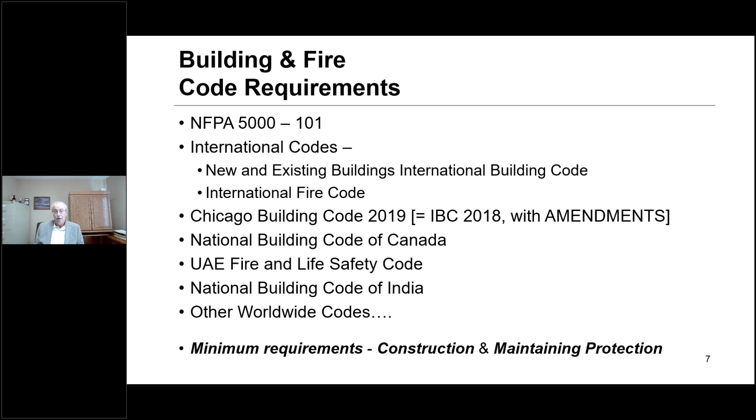One thing I missed earlier - we talked about the National Building Code of Canada. They have a similar code, the National Fire Code of Canada, which covers the same sort of information that the International Fire Code covers here in the US. It talks about how you use the building, what's permitted in that building, maintenance requirements, and things like that. So that's very much an integral part of the Canadian requirements.

So let's talk about fire resistance now. We're going to start basically with fire resistance, then move on to the various breaches or openings in those fire resistive rated assemblies. Fire resistance by definition is a property of the materials or assemblies that prevents or retards the passage of excessive heat, hot gases, and flames under conditions of use.

There are some standards - ASTM E119 or UL263 is what we use here in the US. Canada uses ULC S101. The good news is those three standards are, from a technical perspective, for all practical purposes, the same. Many years ago, approximately 20 years ago, UL recognized that a test run here in the US in accordance with ASTM E119 or UL263 can also be used to show compliance with the Canadian requirements in S101. So that's good news for manufacturers marketing products in both countries.

Here in the US, when we're looking at the International Building Code, Chapter 7 is what I call the nuts and bolts of fire resistance. Once you know what rating is required through some of the earlier chapters - 3, 4, 5, and 6 - now we go to Chapter 7 to determine how we show compliance with those requirements. Section 703.2 says fire resistance shall be determined in accordance with section 703.2.1 or 2.2, without the use of automatic sprinklers or other fire suppression systems being incorporated.

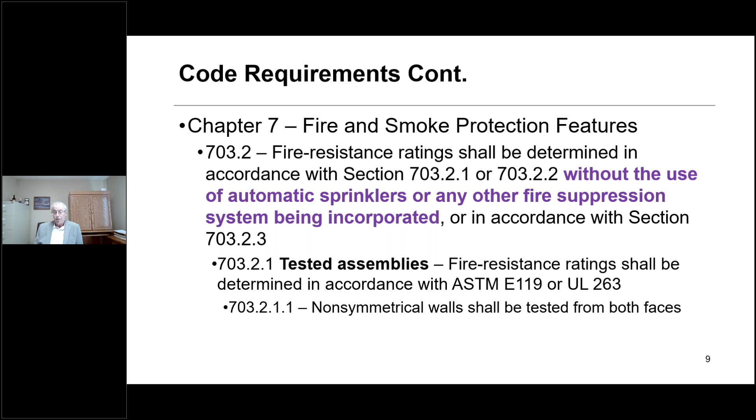Beyond that, I don't have a slide to support it, but the second method of determining fire resistance is through analytical methods - your practical methods. Go to the UL directory, go to the prescriptive or calculated fire resistance in the codes, and that's how you can then show compliance with the code requirements.

But again, those methods are still based on those two test standards. The third method is through the alternate materials and methods section, 104.2.3 by the latest 2024 code, which allows some alternate methods of looking at fire resistance, including the use of a fire suppression system during the conduct of the fire test.

Moving on to chapter 7, one of the basic principles of fire resistance is you always support fire resistance rated construction on construction that has an equal or greater rating. There are a couple exceptions in the code, but for the most part, you're always supporting rated construction using rated construction.

Continuity provisions are another classic example of provisions in the code. Fire barriers shall extend from the top of the foundation or floor ceiling assembly below to the underside of the floor or roof sheathing, slab, or deck above, and should be securely attached thereto. Bottom line: these fire barriers go from floor to the bottom of the deck above to complete the continuity of that barrier, preventing fire from breaching above the top of the fire barrier.

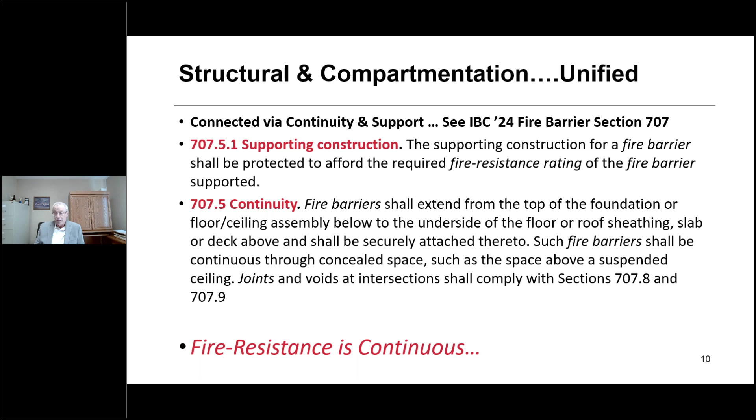Each type of assembly has similar continuity provisions. As far as the standards used to establish fire resistance here in the US and in the United Arab Emirates, we use ASTM E119 or UL 263.

Now, there was a third standard for fire resistance, NFPA 251, that was withdrawn around 2005. The reality is the three standards writing organizations in the US pertaining to fire—UL, ASTM, and NFPA—got together many years ago and said, why are we duplicating efforts, writing three standards to cover the same test procedure? It's a waste of resources. Standards development is a very resource intensive process, so we're spending a lot of extra time for nothing. Ultimately it was agreed that one of those three organizations would withdraw standards where there's duplication, and following through with that philosophy, NFPA withdrew 251 around 2005.

In Canada, we use ULC S101 to develop fire resistance, which for all practical purposes is the same as the two US-based standards. In Europe, India, and the UK, they use other standards. ISO 834 is the international standard. In the UK, they use BS 476 or EN, the European standard 1363.

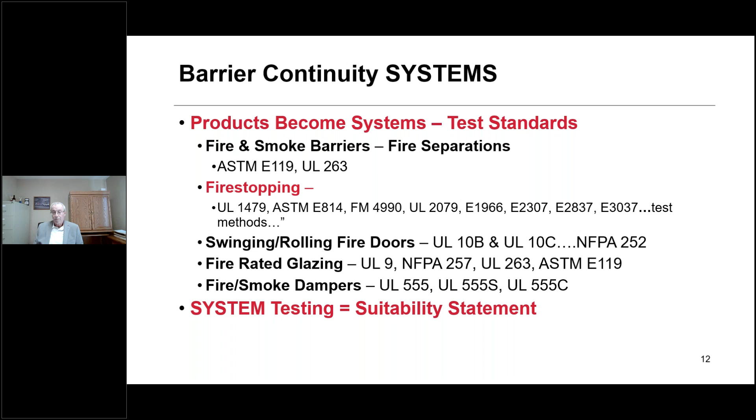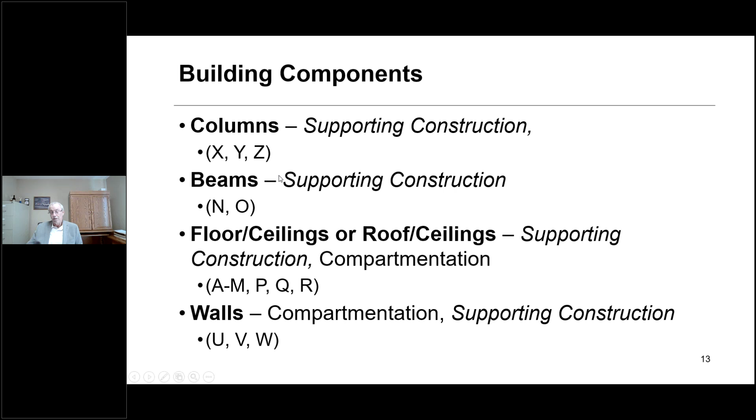In terms of testing for fire resistance, the standard divides the building into individual components: columns, beams, floor-ceiling or roof-ceiling assemblies, and wall assemblies. The letters you see beneath each type are the UL design designations, how UL publishes those listings. Columns are published under the X, Y, and Z series designs, et cetera. That's specific to UL.

Let's look at the testing of these basic building elements, starting with a column - by far the simplest. The sample size is a minimum of 3 meters or 9 foot in length. In all cases here in the US, these assemblies are tested non-loaded or unloaded. Other parts of the world do test columns with a load applied during the fire test, but we don't do that here in America - we test them unloaded and use a temperature criteria.

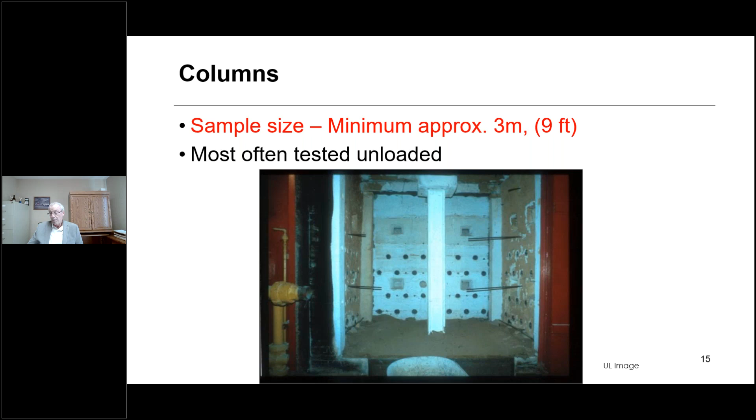In a column test, the testing laboratory typically purchases the column, pours a concrete cap on top and bottom, puts legs on it to keep it upright, and installs thermocouples embedded into the steel to measure the temperature rise during the fire test. The criteria relates to temperature rise. The furnace door is slid closed, the natural gas jets are ignited, and the temperature follows a standard time temperature curve. When the steel temperature reaches 1,000 degrees average or 1,200 degrees at any individual point, that's referred to as the temperature endpoint or fire resistance rating of that column protected in that particular manner.

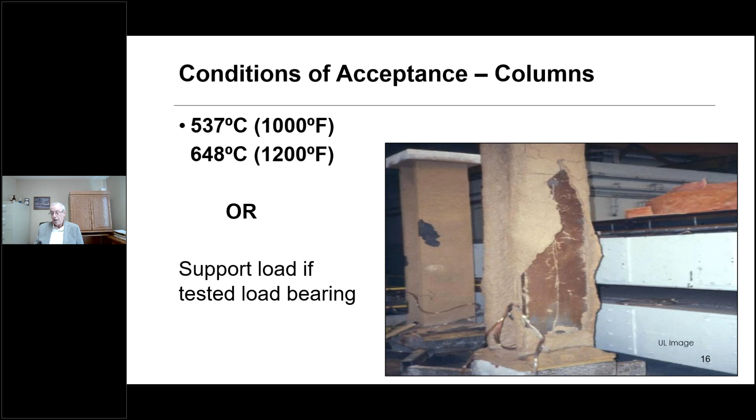We can do fire modeling on straight fire resistant materials quite easily, but what those fire models can't account for is the fall off of material—they can't predict that. That's why I always say, and UL's policy was always, that we use fire modeling to supplement fire testing. Once we've established that material stays in place, then we can use fire modeling to monitor heat transmission through the assembly.

The concept of a full-scale assembly is that it's large enough to allow the assembly to be loaded during the fire test, and large enough to get a significant amount of deflection. So mid-span, we may get somewhere in the neighborhood of 10 to 12 inches of deflection on that beam. As it's deflecting downward, it places the protection materials into tension, causing or promoting delamination of the material. If the material is prone to delaminate, it's going to do so under those conditions. That's why the standard is very specific in terms of the minimum length and the fact they're loaded during the fire test.

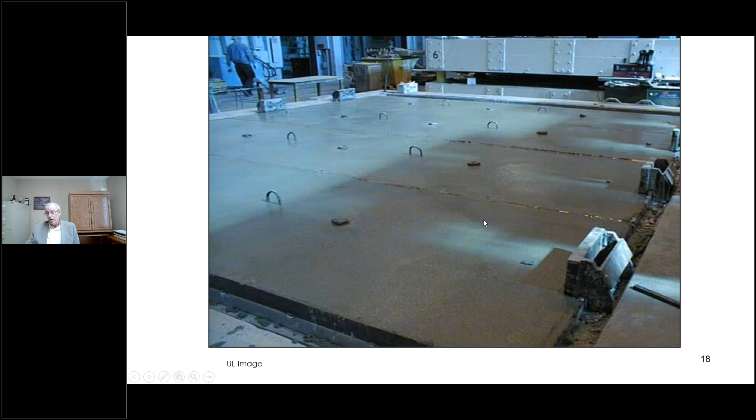After the concrete's cured, the manufacturer's rep comes in and installs the protection material. In this case, it's a sprayed fire-resistant material on the underside of the assembly, applied to the beams themselves. This assembly represents a construction method where the steel deck is not protected. In some cases, a steel deck may be protected.

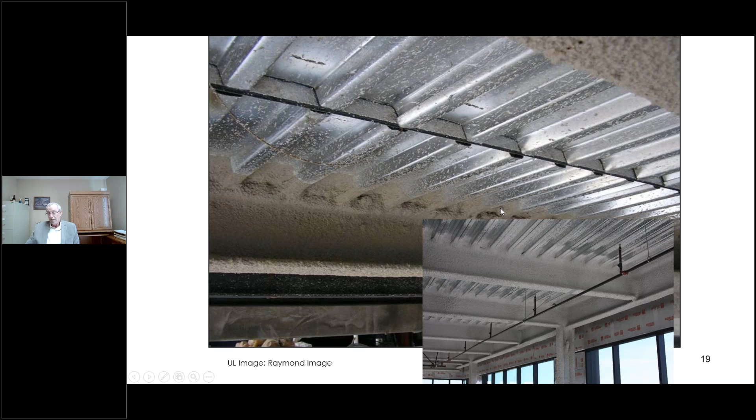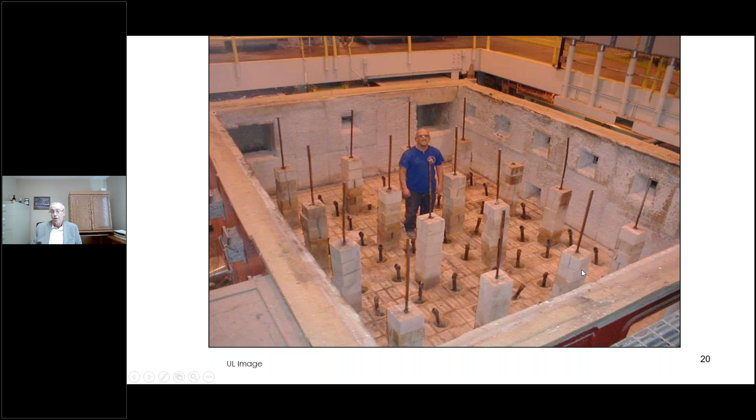This is the furnace that's used for determining the fire resistance of those beams, and for that matter, floor-ceiling assemblies. Andy is standing in the furnace, so you get an idea of the relative size of the assembly, 14 foot by 17 foot—it's a full scale, large scale assembly. The pipes coming off the bottom of the furnace are the natural gas jets. These taller pipes are the thermocouples used to measure the temperature within the furnace during the test, following that standard time temperature curve.

So the furnace fire is ignited. The furnace temperature follows the standard time temperature curve, with loading being applied simultaneously. As the beams heat up, they lose their strength, they begin to deflect, and ultimately the conditions of acceptance would be that the assembly needs to support the load, or there are some temperature limitations.

Temperature limitations would be 1100 degrees Fahrenheit as an average of thermocouples on any beam, or 1300 degrees Fahrenheit at any individual point. One might ask why we have both supporting the load and temperature as criteria—it kind of relates to the restrained versus unrestrained argument. I won't get involved in that right now, but that's why measurements are made both ways.

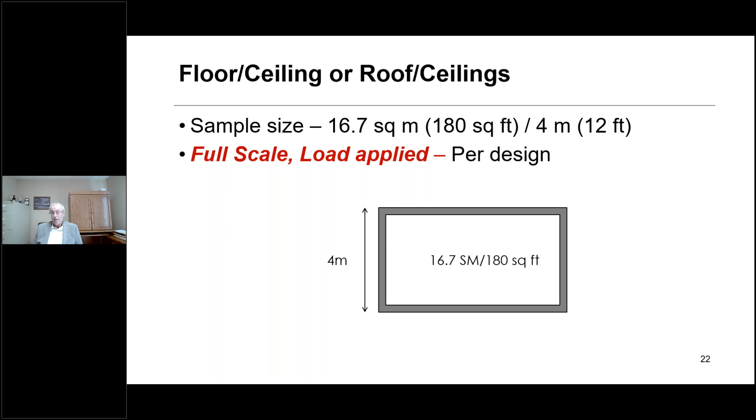As far as a floor ceiling assembly, it's pretty much the same. We have a large scale sample, minimum 180 square foot, no dimension less than 12 foot. Once again, they're tested full scale with a load applied to the assembly during the fire test. The construction process is very much like what we just saw for the beams, so I won't show that to you again.

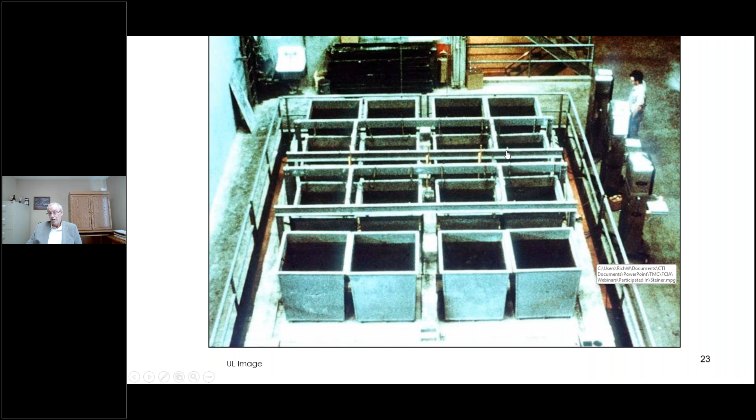And like we saw for the beam test, beams are loaded to their maximum capacity through hydraulic rams, applied through this steel loading equipment placed on top of the furnace.

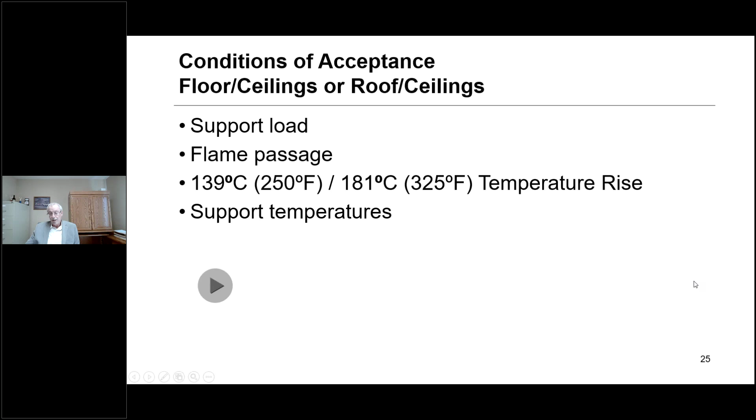So we have 4 criteria for those floor ceiling and roof ceiling assemblies. The assembly needs to support the load, prevent flame passage, meet certain temperature limitations on the top side of the assembly, and also the beam temperatures we saw earlier would also apply: 1,100 degrees Fahrenheit average, 1,300 degrees Fahrenheit individual point.

So at this point, I'm going to let Bill cover these next 2 slides. I'll maintain control of the PowerPoint, but go ahead, Bill. Sounds like a good plan there, Rich.

Let's talk about a couple of things. I mentioned early on that we were going to talk about the DIIM for several of those things. Rich just went through a lot of structural fire resistance, fire testing, and that ties in with fire stopping, which is installed in a fire resistance rated wall assembly. The wall assembly, according to the International Building Code and other codes around the world, says that a fire resistance rated assembly needs to rest on a fire resistance rated assembly of equal value. How do we do that? That's the structural fire test that Rich just went through, the ASTM E119, UL263.

In order to protect steel from reaching its temperature at which it softens, around 1,000 to 1,300 degrees Fahrenheit, fireproofing is applied to it, whether it's intumescent fire-resistant materials, spray fire-resistant materials, or boards and wraps. Those materials need to be applied in a way that reflects the listing, including the thickness of fireproofing, and also the manufacturer's installation instructions. The manufacturer's instructions specify the temperature the steel has to be to receive the material, application temperature limitations, and much more. The manufacturer knows their chemistry and how it should be applied, and that's where the manufacturer's instructions come in.

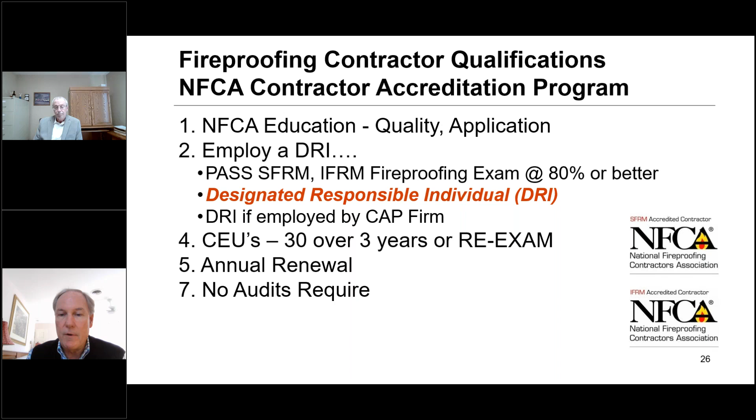The second one is the UL Qualified Fireproofing Contractor Program. The NFCA worked with UL at the same time the FCIA was working on their Qualified Fire Stop Contractor Program. They were paralleling each other, in the time frame 2003 to 2007. At the time, Hugh Dudley was the executive director of the NFCA, and I was working on the UL Qualified Contractor Program with FCIA member volunteers from the accreditation committee.

The Qualified Spray Fire Resistant Material Contractor Program is similar to the FCIA program in that it's got a DRI part too. The difference is that UL looks at the NFCA's exam as the exam to pass. That's different from the Fire Stop Contractors Program, where the FCIA provides the education and the education manual, the FCIA Fire Stop Manual of Practice, and they pass a UL exam for that particular program.

In this one, again, it's the NFCA's exam that gets you there, and then the contractor has to build a management system with 10 points met. How do you manage the things you do as a fireproofing contractor to get it installed in accordance with the listing and the manufacturer's instructions? In a nutshell, that's what these contractors do.

There's a groundswell, I'll say, of companies about to get accredited. There's only a couple currently for fireproofing. There's a couple hundred, over 100 UL qualified contractors in the UL Qualified Firestop Contractor Program. But there's an audit, an initial audit, and then an annual audit by UL personnel, a third-party qualification program. Pretty cool program, and it's something the fireproofing industry has done to have the eye of installation there.

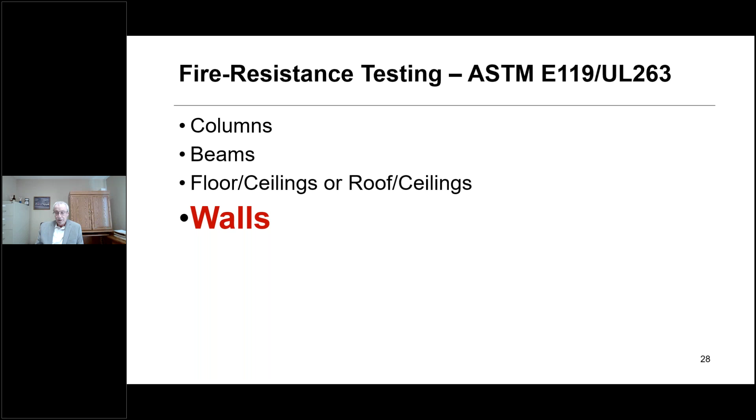So anyway, let's continue our discussion on testing. Now we're going to look at wall assemblies. Before we do that, let's look at the codes. Codes define a number of different types of wall assemblies, each having a specific use under that code. The definitions of these types of walls vary between the various codes, depending on whether it's an NFPA code, an ICC code, Canadian code, Indian code, United Arab Emirates code, etc. So here's a kind of a grouping of terminology.

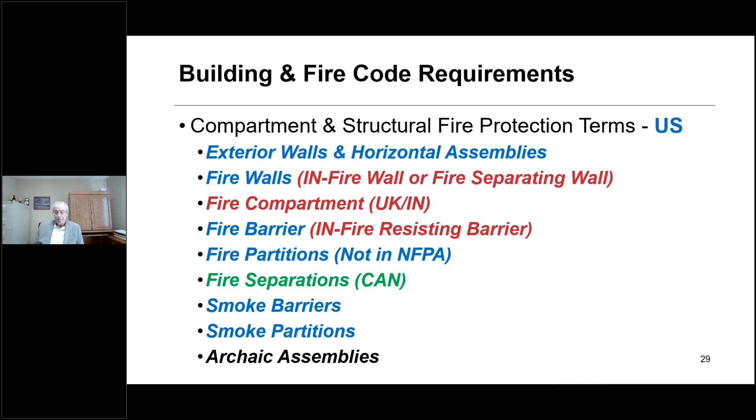So we do that through protecting the structural steel, and through building wall assemblies from materials that withstand that fire exposure.

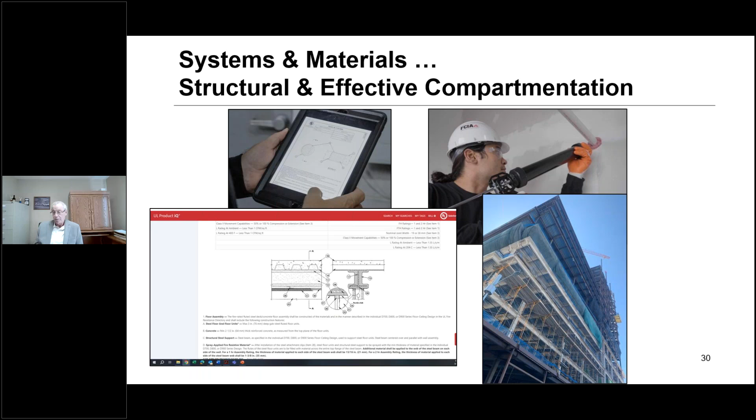So once again, we're talking wall assemblies. We use the same standard time temperature curve for walls as we do for the horizontal assemblies or structural elements.

For wall assemblies, they're tested to ASTM E119 or UL 263 or ULC S101. The criteria really relates to flame passage. There can be no passage of flame through the assembly sufficient to ignite cotton waste applied to the unexposed side of the assembly. They need to limit the heat transmission to the unexposed side to an average temperature rise of 250 degrees Fahrenheit above ambient, or an individual temperature rise of 325 above ambient.

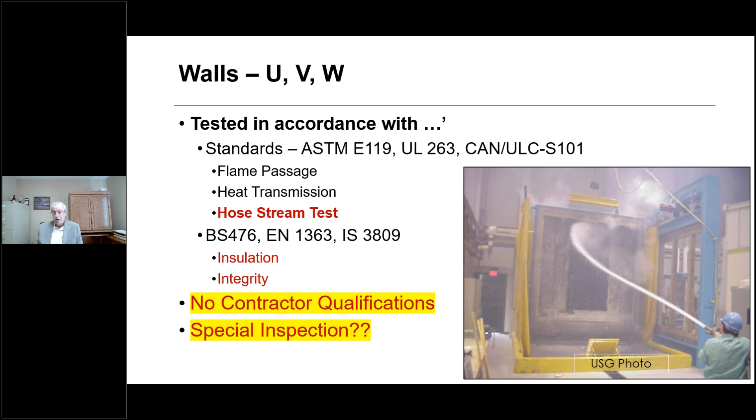So in terms of gypsum board, I don't want to spend a lot of time here, but in general terms we have three grades of gypsum board: a regular grade material, used in non-fire resistance rated construction, typically residential construction for example; then type X, which is kind of the baseline fire resistive rated gypsum board; then type C, which is a little more robust panel.

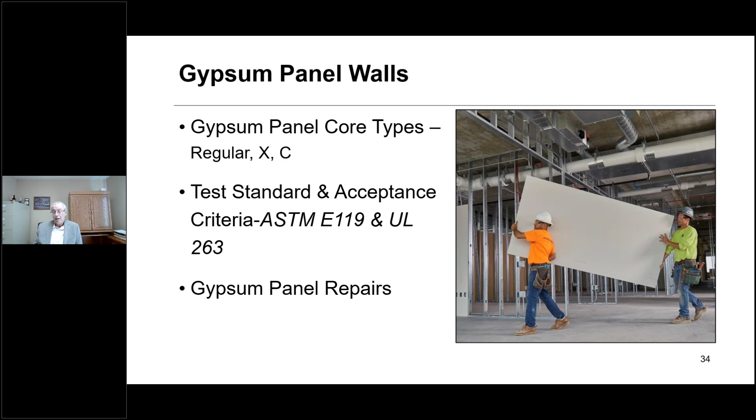I call them a type X board on steroids. It performs a little bit better, uses some additives in the core which control shrinkage and give it more structural integrity. Once again, the same test standards are used for the gypsum board based products as for the rest of the products. There are methods of repairing gypsum panels—we'll talk about those in a minute.

But I talked about the various codes earlier. NFPA 1 is the fire code published by NFPA, and it has some maintenance provisions relating to gypsum panels. It says, where required, fire rated gypsum wallboard or ceilings that are damaged to the extent that through openings exist shall be replaced or returned to the required level of fire resistance using listed repair systems or using materials and methods equivalent to the original construction.

And so there, we'll talk about GA 225 in a minute, which is a repair procedure from the Gypsum Association, the trade association for gypsum manufacturers. But it's not as simple as just covering the hole with another piece of gypsum board and screwing or adhering it in place with sealants—it's a little more involved than that.

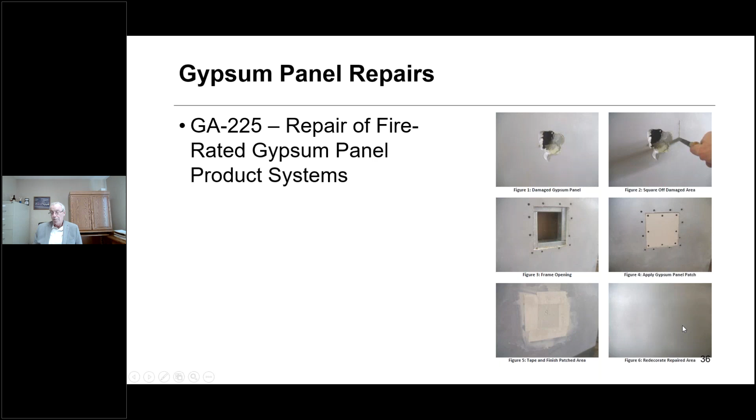You see the screws that attach that framing material around the opening, and then we put another piece of gypsum board cut as close as possible to the size of the opening, screw it to the framing located behind it, then mud and tape it, finish it, and that creates a repair process that restores the rating of that gypsum panel or wall to the original requirements. So moving on, let's look at fire dampers.

Fire dampers are evaluated by a wide range of standards. Fire dampers really come in 5 types: fire dampers, smoke dampers, or combination dampers, which meet the requirements of both a fire damper and a smoke damper. Then a ceiling radiation damper, where we're penetrating the lower membrane of a ceiling. And a unique subset of that is what's referred to as a corridor damper.

I won't get too involved in that, but we have 3 standards here in the US. Likewise in Canada, there's standards to cover that: ULC S112 for fire dampers, 112.1 for smoke dampers. ISO has a standard for fire dampers. There's an EN standard, European norm standard for fire dampers, both for fire passage, what they refer to as integrity, or for smoke leakage.

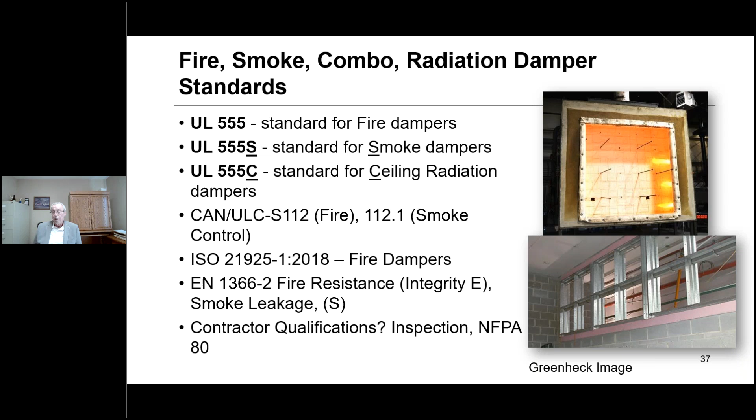There are some pretty specific requirements for installation of fire dampers published through NFPA 80. NFPA 80 is an installation standard that covers both opening protectives - fire doors in other words - and also dampers. So there are some qualifications and requirements for the contractors doing that installation, likewise for inspection of those items once they're installed.

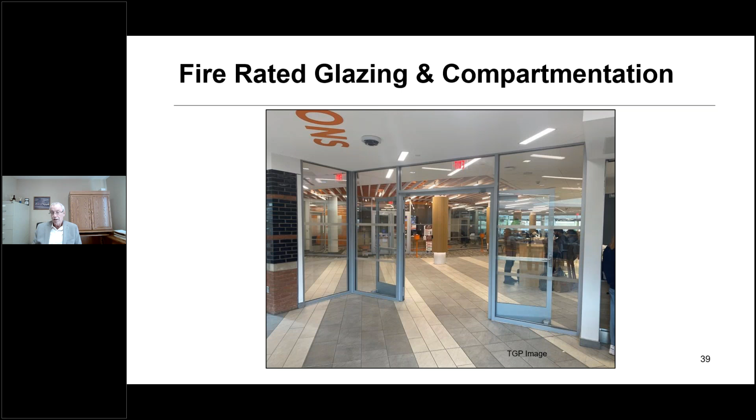So then we have fire-rated glazing, again used to protect breaches or openings in fire-rated assemblies. In this case, we've got some doors and windows on either side of that door that need to be protected. We typically protect items like that using fire protection rated glazing - glazing that gets hot but prevents passage of fire and also meets the hose stream test standards.

There's some standards for glazing when used in doors - they're evaluated as part of the door assembly to UL 10B or 10C or NFPA 252. If they're used as fire window assemblies, they're evaluated to UL 9 or NFPA 257. Likewise, the National Building Code of Canada references testing of glazing to NFPA 80, which describes those same tests. ULC does have a standard for fire protection rated glazing, ULC S106. Likewise, there's an ISO standard that covers flame passage through that glazing material, and an EN standard that covers the fire performance, fire protection rating of that glazing material.

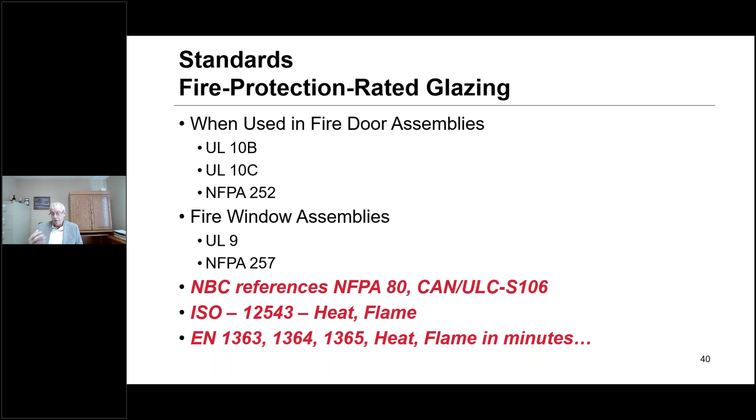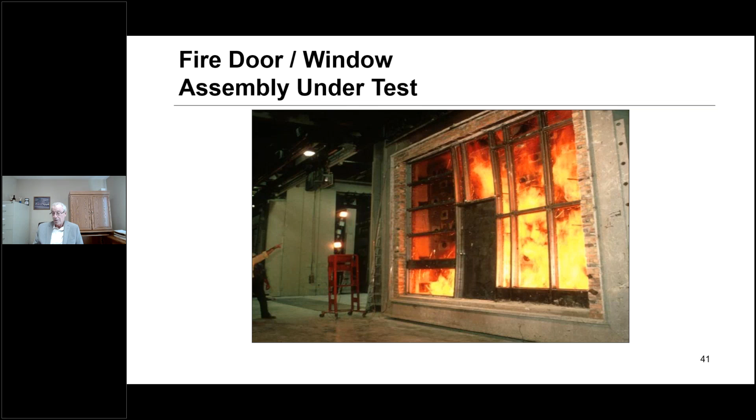So for a fire protection rating, the glazing needs to prevent passage of flame. It needs to meet the hose stream test conducted after the full duration fire exposure. But the key for fire protection rating is it does not limit the amount of radiant heat going through the assembly - it is not a wall assembly, doesn't have those temperature limitations. So if you're this little individual on the opposite side of that glazing, you are going to feel a very significant amount of heat or radiant heat from that glazing material.

So likewise, with doors, there's some quasi-contractor qualifications in NFPA 80, likewise installation requirements and maintenance requirements.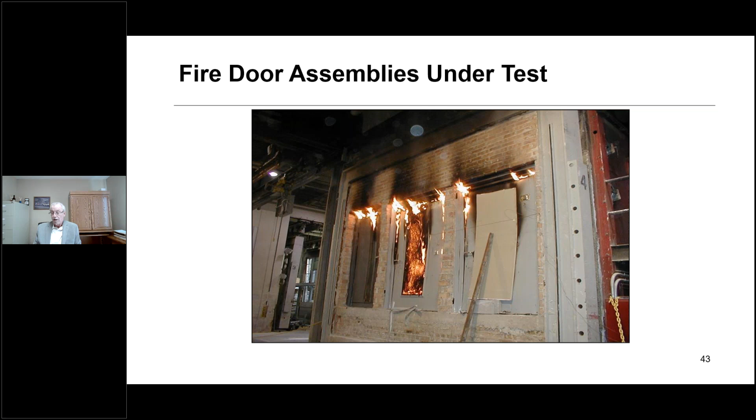These tests were done in the early days of UL 10C. 10C is what's referred to as a positive pressure fire test, so the pressure in the furnace is higher than the pressure in the lab, which tends to drive the flames around the voids around the perimeter of the door and ignites the edge if it's a wood-based door, creating a situation like this. This was taken in an era where the industry was learning what it takes to pass a 10C fire test.

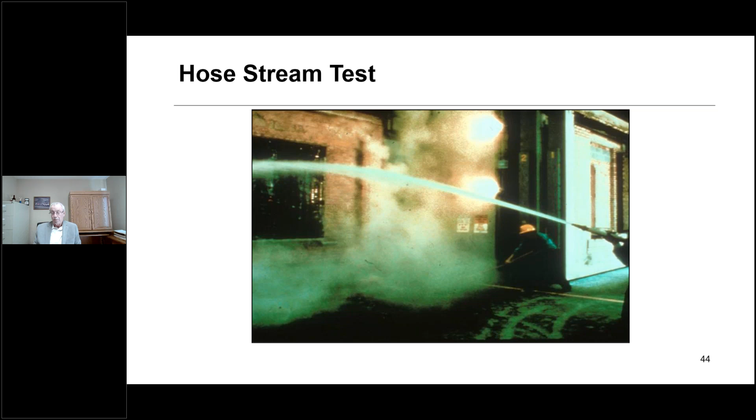So all door assemblies are subjected to a hose stream test. Well, the standard requires all doors to be tested by hose stream, but the code does have a provision for door ratings of 20 minutes without hose stream for certain applications, like corridors with a 20-minute rating. But other than that, doors are required to meet a hose stream. Again, the concept is there be no openings through the door assembly. The language in the code is that there be no opening visible through the assembly as viewed from the unexposed side after the test.

10B is for all other types of doors, rolling steel doors, and so on. It's referred to as a neutral pressure test, whereas 10C is a positive pressure test. And then there's an ISO standard and a BS standard that likewise describe the fire exposure testing of door assemblies, very similar to what we use in the US, other than, again, no hose stream test.

And of course, we have the fire stop systems. I'll skip through this pretty quickly since most of you are probably familiar with them. So we establish individual published fire stop systems through testing to certain standards. The standards define various ratings: F, T, L, W, and M rating.

In Canada, the hose stream test is broken out as a separate test from the fire test. It's all done as part of the fire exposure testing process, but the rating is broken out. So systems that have an F and a T, or an FT rating, are not required to meet a hose stream test. If a system does meet the hose stream, it's also given a designation of an H rating as part of the published information.

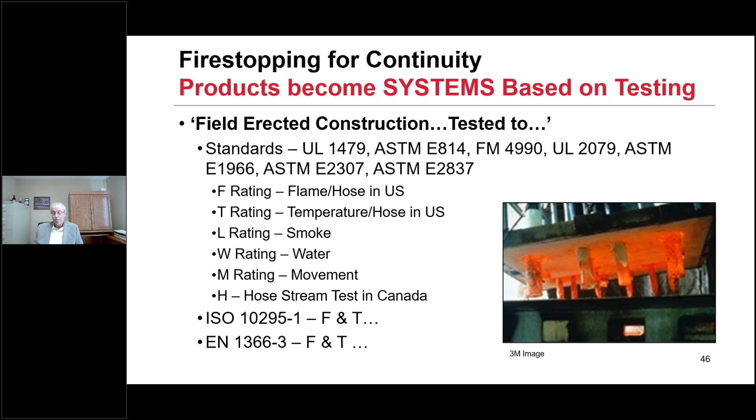And then we have perimeter fire containment. How do we address that void between the exterior curtain wall and the floor slab? We protect it with some material or system that prevents passage of flame through that interior safing slot. Systems are tested to ASTM E2307 here in North America. Canada has a similar requirement, or EN 13501-2 in the European community.

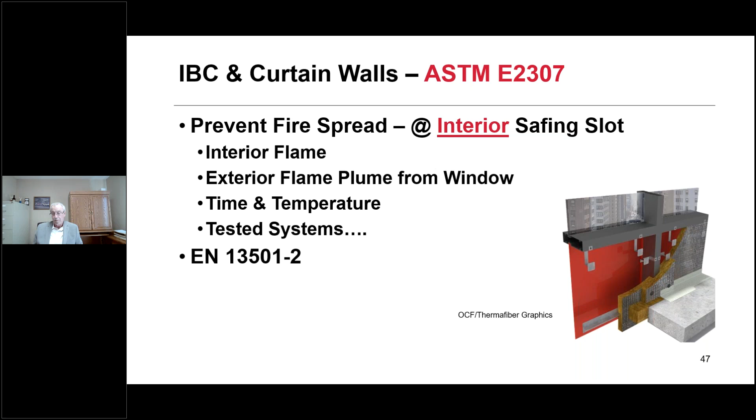So the codes in the US in particular define various types of smoke rated barriers, such as a smoke barrier and a smoke partition. A barrier is a more robust assembly that also has a fire resistance rating. A smoke partition simply limits the transfer of smoke through that assembly. Whereas if you have a smoke barrier and there's an opening or penetration in that assembly, you need to develop tested constructions or material methods that prevent or restrict the passage of smoke through that breach.

So in the case of fire stop systems or joint systems, we refer to that as an L rating. For doors, it's referred to as a leakage rated door. For dampers, it's referred to as a smoke damper. NFPA has similar requirements for restricting the passage of smoke.

In chapter 8, we have quantified fire stop L ratings. In the healthcare chapters, there is no quantified rating, but there is a generic description for preventing migration of smoke through those assemblies. And once again, the continuity provisions also address smoke leakage.

The UL standard also defines a W rating, a water leakage rating, basically verifying that the assembly will first prevent passage of water through the system, and secondly, and more important in my mind, it needs to pass the fire exposure hose stream test after exposure to the water. So if the system gets wet at some point during its life, and you've got a W rating system, you can be confident it will continue to provide its fire function despite getting wet.

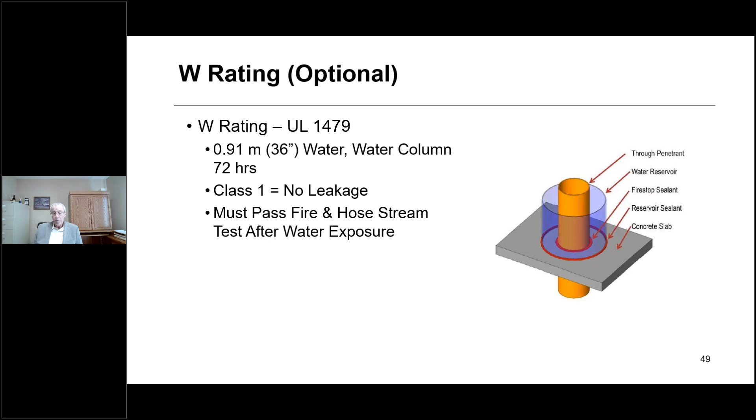And if it does not have a W rating, the question always exists: will that fire stop system provide its fire performance if needed after exposure to water? And very likely the answer is no. So this is an important rating that probably hasn't received its due justice over time.

Moving on, we have an M rating, a movement rating, a relatively new rating for the fire stop industry. The idea is we're movement cycling the penetrant relative to the barrier it's penetrating. This is a concept that Bill McHugh actually brought up to UL, I'm going to say around the year 2001 or 2002.

That maybe we should be looking at relative movement. Pipes move, we have steam pipes, they expand and contract, we have water hammer. In certain parts of the US we have earthquakes, all of which creates movement. Is that going to impact the fire performance of the fire stop? Maybe, maybe not, but let's prove it by test.

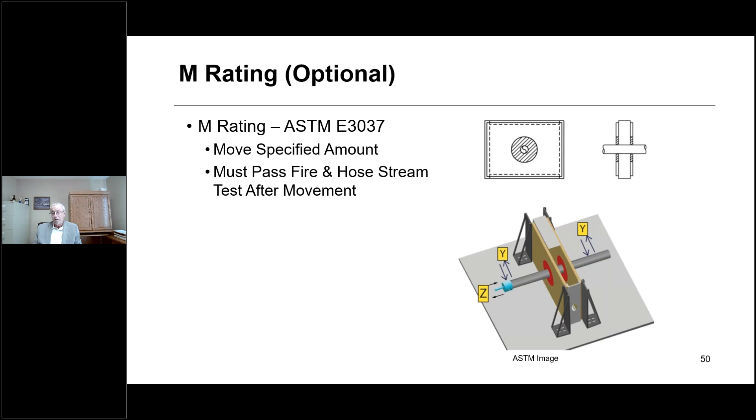So that's what the M rating does. It preconditions and moves the penetrant relative to the wall, and then it's subjected to the fire exposure test after that movement process. So at this point, I'm going to turn the slides over to Bill, who's got a block of slides here, so maybe it's better he take control.

Yeah, good stuff there, Rich. Just to continue on with the ratings for penetration, joint, and perimeter fire containment, you mentioned several different accessory standards, I'll say, to the UL 1479, ASTM E814, the W rating, and also 2079. That W rating, pretty cool.

And I think you're right, I don't think it's been given its due really enough. It is something that's important. We know that while buildings are under construction, windows are not installed, water, rain, storms come flying in. When people are cleaning floors during construction, they're throwing all kinds of water on it.

And then after occupancy, water winds up getting places. A sprinkler system bursts, a toilet bursts, and a whole floor winds up flooded out where all the penetration fire stops are. How's that going to resist that exposure and perform in a fire? That's why it's important, like you mentioned, Rich, that the fire tests take place after the water exposure. And then the same thing in that movement standard. I know you were personally involved with the W, and yes, also the M.

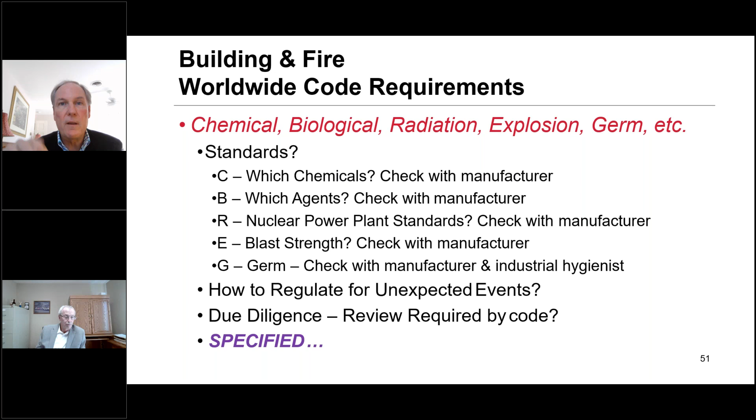Up, you're off, your sound's off.

I will say, as long as that word 'around' is part of the question, yes, they are still around. Are they being installed? Very, very, very infrequently. Still manufactured?

I believe there are some UL listings still for tin-clad doors. UL's original Northbrook fire testing facility was built quite a while ago, and UL bought it in '56, I believe, and it had been an existing building for a number of years. So anyway, point is, there were some tin-clad doors in UL's fire protection facility. So they're still around. Whether they're truly being installed, I don't know.

Good question. So to give a hint to the friend that asked, take a look at UL Product IQ, hit search, and see what you come up with for tin-clad. Do you know what the classification looks like? Does it have a hyphen in it, tin-clad, Rich? It would have a hyphen. So when you're on the Product IQ online directory, as a keyword, type in tin-clad, or even on the home page, in that create a search now box, type in tin-clad.

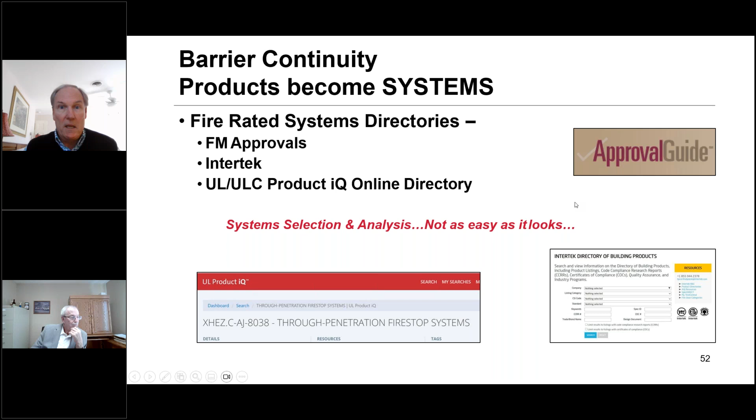So, good question. Appreciate you asking that, our friend that I met back in 1980-something, and appreciate you being on the call as well. And to answer your question about the M rating, I think you and I talked about it, Rich, in 1994 for the first time. Yes. It takes time for standards to evolve, as you can see.

It does. Rich, if you want to jump in and comment as I rattle through the engineering judgments — engineering judgments get done on lots of different things, not just fire stopping, but fireproofing too. You see it, and it's really important to know the protocol. I think FCIA's protocol, in the Fire Stop Manual of Practice, really applies to other fire resistance industries too. If you can find a listing, use a listing first.

If the listing in front of you as the installer in the field doesn't fit, then you find another system from the same manufacturer. If you can't find one from the same manufacturer that's already been submitted and approved, let's find one from a different manufacturer that's tested and listed in one of the directories. And if no listing exists in either case, then we start thinking about engineering judgment, following a certain protocol.

Let's talk a little bit about engineering judgments and who should be doing them. In FCIA's opinion, it's an 'and' — the manufacturer and the testing laboratory. I think the testing laboratory is pretty equal to the manufacturer. The only thing they don't know as a testing laboratory is the chemistry of those products. So that's why I keep throwing in the 'and,' Rich — you can debate me a little if you want, but in my opinion, the chemistry is known by the manufacturer.

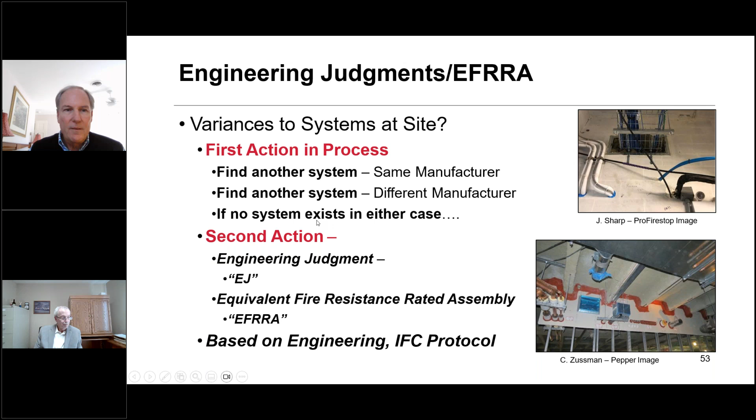Any further comments there, Rich? No, I think you've covered it well. Appreciate that. Okay, so we've been talking for an hour and 20 minutes.

We haven't really shown much in the way of installation stuff, so what happens when we get to the field? The IIM, the installation - FCIA was a code proponent to put in the International Building Code, Chapter 7, to install these products in accordance with the listing and the manufacturer's instructions - penetrations, joints, perimeter fire containment, and fireproofing too. We haven't done much in fire doors, nor in gypsum wall panel or concrete block areas, but maybe that's future code proposals for others to bring forward as the 2030 code gets developed, because we're already done submitting things for the 2027 version of the International Building Code.

So listings first is what contractor personnel should be doing - understanding the size of the opening or breach, understanding the size of the penetrating item, and then applying the sealant or FireStop products with appropriate safety equipment on - glasses, hard hat, gloves, all on the safety data sheets for people to use. These are the things we look for. We're going to look at how fireproofing might mix with fire stopping at the head of wall.

Important to know these two things: look for the P700 series, P900 series designs for the deck, which might have spray-applied fireproofing on it. So what do we do with the FireStop system? Some FireStop systems are not allowed to have the FireStop products touch fireproofing. What do we do then? Do we take off the fireproofing? No, we'd be better off finding a listing that has fireproofing integrated with the FireStop system in the listing itself.

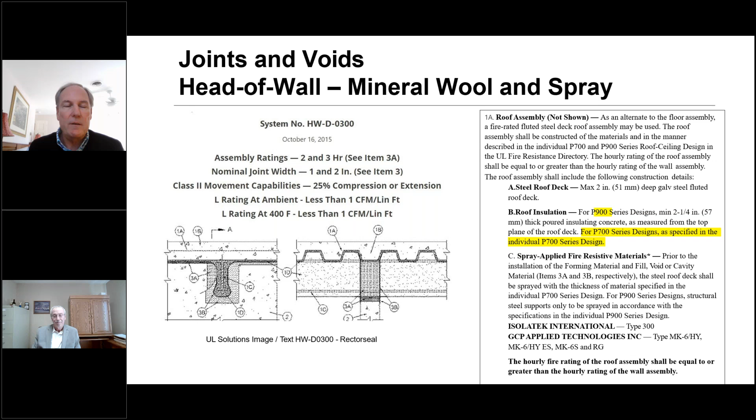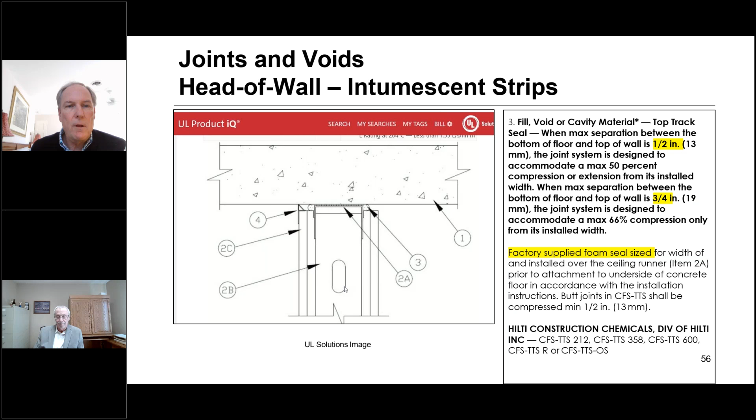That listing has to be looked at in great detail, regardless of the manufacturer of the FireStop product that's used. In this type of an application, maybe there's a spray that's been used, maybe there's a sealant that's used, maybe there's tapes that are used. All of this has to work together in order to provide a fire resistance rated assembly.

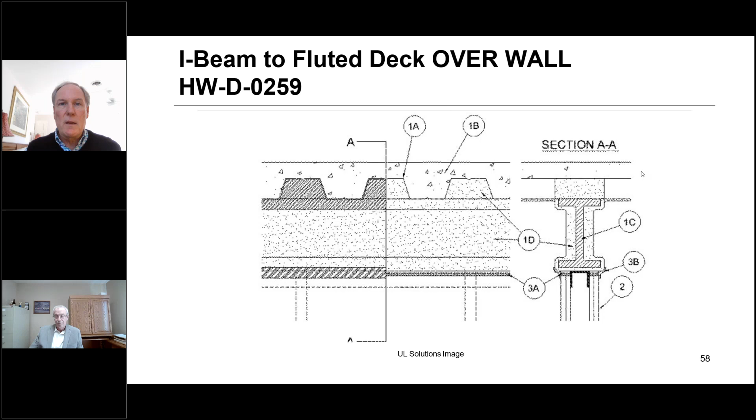So as a specifier, maybe you point out somewhere in the drawings that the wall and the beam are one, and that the beam is functioning as a wall in addition to the wall itself. That way the fireproofing industry understands, and the general contractor understands that there's more fireproofing required there, and it doesn't get missed. That can be a big miss when it comes to estimating the thicknesses and the amount of thickness that's there as well.

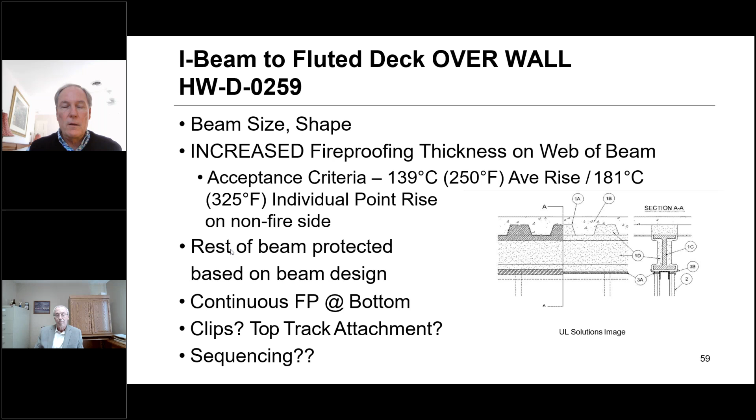So here's all the temperature rise and the non-fire side of the assembly. Rich has clarified this nicely so that, right here where it says increased fireproofing thickness, it's a key thing to keep in mind, because there can be miles of walls, there can be miles of fireproofing that's needed to be done too.

So here's what the FF-D-4001 would look like. The specifier would say, give me a fire resistance rated assembly with a mechanical joint top of some kind. Maybe it's aluminum, maybe it's steel, whatever it is, aluminum, bronze, steel, from multiple manufacturers, but it's got to be a 2-hour rated, and it's got to be able to extend and compress 50%. As a specifier, that gives you the generic language.

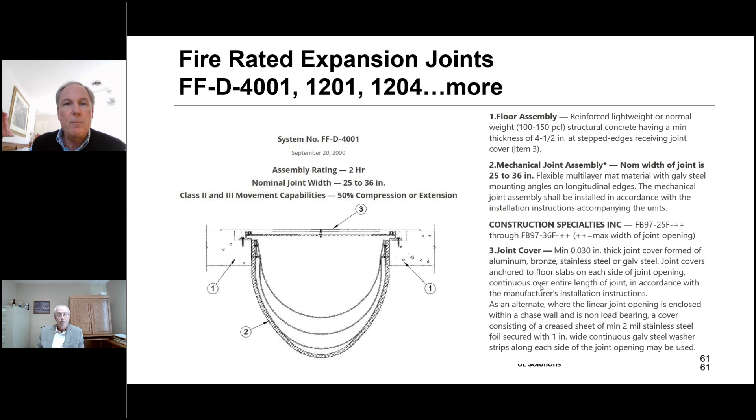The contractor can then go to specified manufacturers or to construction specialties, MM Systems, Balco, and say, all right, I need this kind of a joint. And that's where the competition takes place that the specifier is looking for, to get the best price for the building owner and manager. So we've talked about design, we've talked a little bit about install, but let's talk a little more about the FM and UL contractor programs.

What's the first thing a contractor has to do to figure out which systems to select? What does the inspection agency have to do to analyze those? To us, the contractor is responsible for selecting those systems. From an architect's perspective, it's next to impossible to specify the exact system for each project. It creates a closed spec, which the architect and specifier may or may not want to do.

The building owner may want to have competition amongst manufacturers to come up with the best product price, and there's competition with contractors to come up with the best installed price. There's competition amongst special inspection agencies to come up with the best inspection price as well. So, looking at the long view, these are the things required for all of the entities to select, analyze, and believe it or not, maintain protection.

When looking at the wall or floor construction, you've got to figure out what the fire resistance rating is. What's the type of wall? Gypsum panels, concrete block, clay tile block, as Richard pointed out, the archaic assemblies. What is all of this stuff? How thick is that floor or wall?

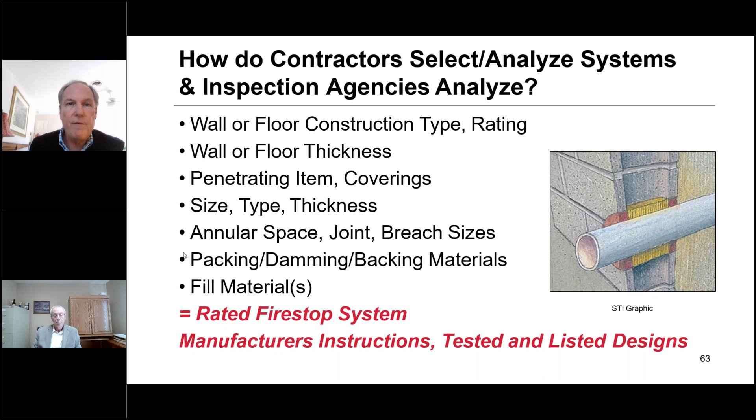Then it's installed in accordance with the manufacturer's instructions and the listing, and that's a key thing. Another key thing is that we did a code proposal for the 2027 version of the building code, got approved at two different hearings, that says the listings need to be at the project site. Huge, that's a big change. And we're going to need our specifier friends to start putting that into the specification to be sure they reflect what's coming in the code development process.

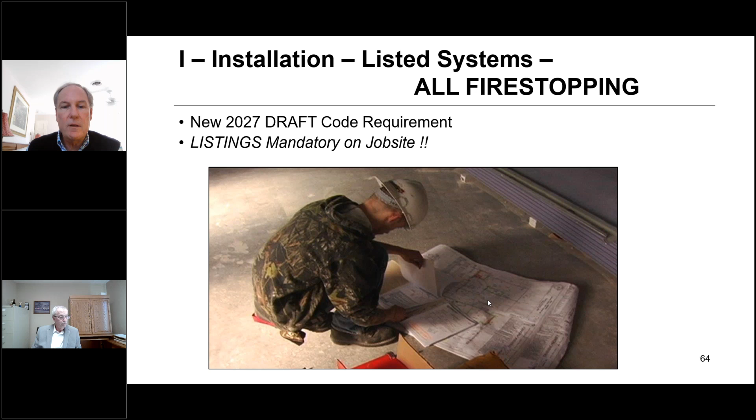So this young person here on the bottom of the slide is doing the right thing: safety data sheets, product data sheets, listings, and then the life safety drawings that give that person the map as to where the fire stops get installed.

I'll invite you to spend time with any of our manufacturer friends to talk about their products. And you can also spend time on the FCIA's Firestop Education Program Level 2. That's where you'll find the advantages, disadvantages, limitations of use, and how they are used in a system for each one of the products in the firestop industry from a very generic perspective - industry specific, not manufacturer specific.

Who installs this fire stopping? Well, it's still kind of a mess. I'm guessing probably between 30 and 60% of the fire stopping in the world gets installed by a specialist fire stop contractor.

The trend is moving up and up. There are more and more jurisdictions where fire stopping is being done by the specialist contractor. It's being driven by general contractors getting sick and tired of somebody just flinging fire stop goop there, and an inspection agency catching that the goop isn't the system.

So in other words, the strategy we laid out in 1999 - how about we have qualified, good quality contractors? How about we have inspection? Those 2 things working together are starting to really show results in our opinion.

So he or she who pokes the hole fills it is one way, and it's getting less and less. Sometimes it's the one who pokes the hole, and then a specialist contractor working for some of those subcontractors, or working directly for the general contractor while others do self-performed work. And then there's the single source fire stop contractor competing against many others, because there are hundreds of UL qualified, FM approved contractors throughout the world.

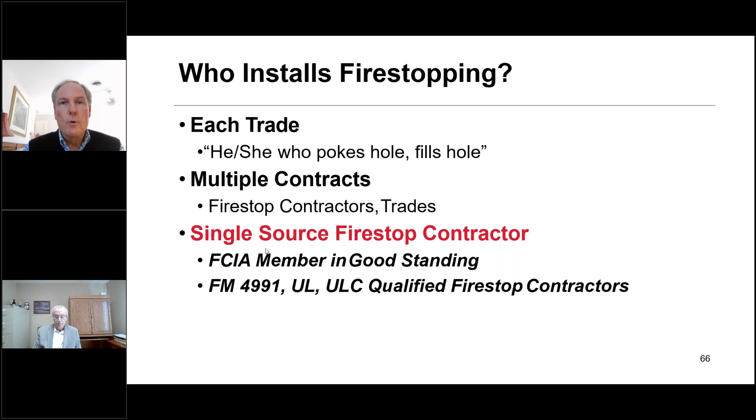Those companies are installing more and more, from what we can see in the industry. Two standards, or one standard plus one program: the FM 4991 program is a standard for approval of the fire stop contractor. The UL qualified fire stop contractor program is very similar. Both are quality management system programs, operated under an ISO type standard, 17020 or similar. They're both credible programs run by nationally recognized testing laboratories.

They're management system programs that produce documentation for the fire stop contractor to give to the building owner and manager. How do you get approved or qualified? Pass an exam from either organization, at an 80% minimum. Have a management system that's written, up to date, followed and implemented at the company, and then get audited by these organizations for an initial audit and then annually.

How much does this stuff cost? Anywhere from $9,000 to $15,000 for the original certification, and then $3,500 to $4,500 a year for the ongoing maintaining program. I can tell you that 4 football games and 4 dinners at Ruth's Chris Steakhouse probably covered that initial cost, and we've well covered the ongoing one as well.

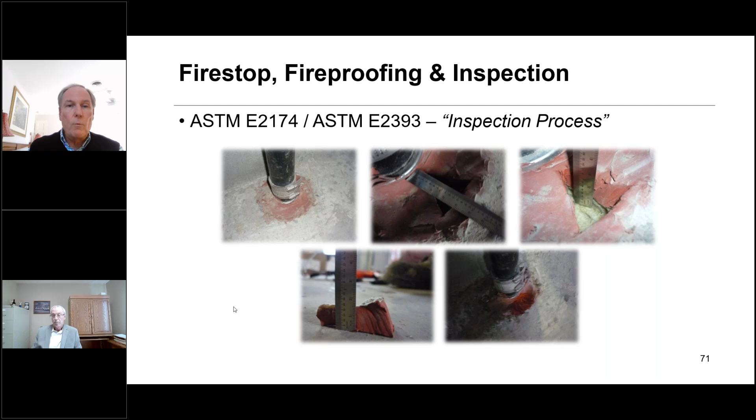Thanks to Bill Koffel, FCIA's code consultant, who helped us get it over the top at International Code Council, and also at NFPA 1 and NFPA 101, where you'll see references to the standard required. Types of buildings: high-rise, residential greater than 250 occupants, and also critical buildings in category 3 and 4, table 1604.5. That's like schools greater than 250, hospitals, police stations, fire stations, air traffic control towers, water treatment facilities, water stations - all that kind of stuff is in category 3 and 4, table 1604.5.

What about other items that get inspected? Fire stopping is inspected, but what about others? Fire dampers - inspected at commissioning, after 1 year, and then every 4 to 6 years. 4 years for every occupancy other than healthcare, 6 years in hospitals. So there's a bit of the I and the M - the M is after 1 year, that's maintaining protection, same with the 4 or 6 years.

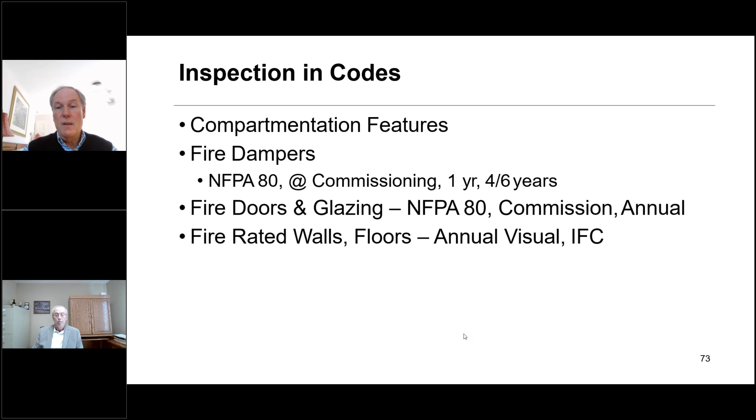Fire doors and glazing - NFPA 80 has something at commissioning, the International Fire Code covers the annual inspection. You'll hear about that from Rich later. Fire walls and floors - the International Fire Code covers it, but there's not much when it comes to third-party inspection of those. Structural fireproofing - Chapter 17 covers it all the time for spray fire-resistant materials, intumescent fire-resistant materials, and then boards and wraps.

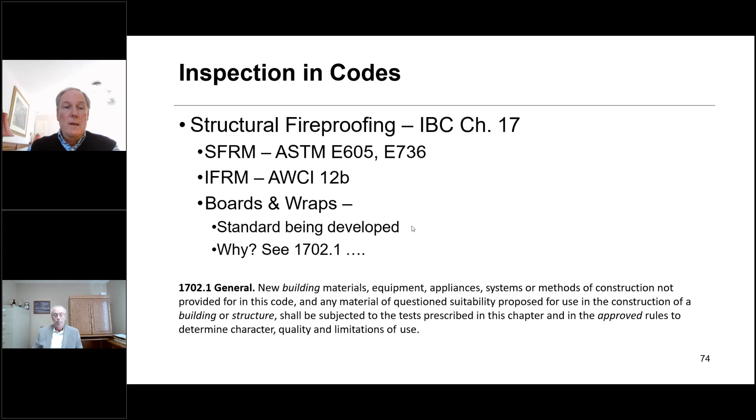There's a standard being developed, but in 1702.1, those materials should be independently inspected as well. Special inspectors ought to be competent in the type of inspection they're doing. How do you prove competency? Pass an industry exam, FCIA,

the International Firestop Council, the UL, and FM Firestop exams. I think those two are probably the best when it comes to fire stopping, the UL and FM exams, because they're objective third party. Certainly the FCIA and the International Firestop Council are also third party, but it gives you a little extra level with those other exams. There's also other ways to qualify as a special inspector, including the International Code Council Certificate of Learning Achievement, etc. The inspectors should not be competitors of the manufacturer, the supplier, or the contractor either.

When it comes to maintaining protection, NFPA 101 is pretty crystal clear. Look at Chapter 4, and this hasn't changed into the 2024 version of NFPA 101. Look what it does: it's got fire resistive mentioned twice, on line 2 and line 5, where it talks about fire resistive construction, continuously maintained. So that doesn't mean, let's say, every year let's go do a repair. Nope. When you find out it's broken, it should be fixed and maintain protection for the life cycle of the building, all the time.

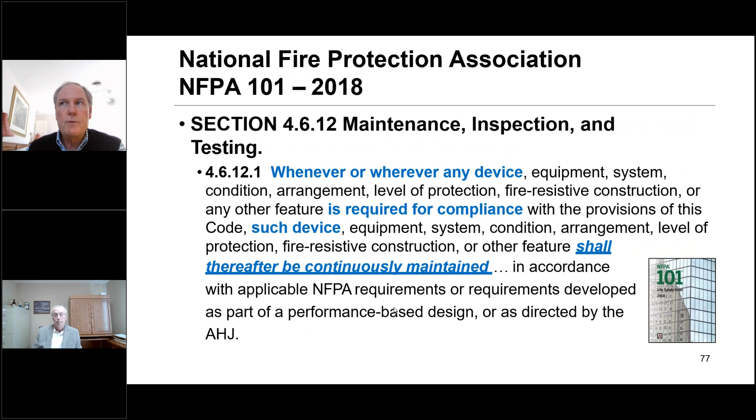Continuously maintained in accordance with NFPA requirements. Those are covered in lots of different areas throughout NFPA 1, NFPA 101, in the NFPA world. NFPA 1 is pretty crystal clear about maintaining protection, and this language, fire resistant construction, covers everything.

So Rich, I'll let you take a couple of minutes to cover these next 2 slides. Just tell me when to move from one to the next.

Okay, will do. So now we're talking about the requirements of the International Fire Code. The International Fire Code was revised with the 2018 edition to very clearly identify what assemblies need to be maintained. Previously there was some language that was sort of intermixed between the basic barriers and the penetrants and joints, doors, and so on. So we basically split it up and created individual sections dealing with each of these items. Starting with the scope, the provisions of this chapter shall cover the inspection and maintenance of materials, systems, or assemblies used for structural fire resistance rated separations, and constructions installed to resist passage of smoke. So it covers all three of those.

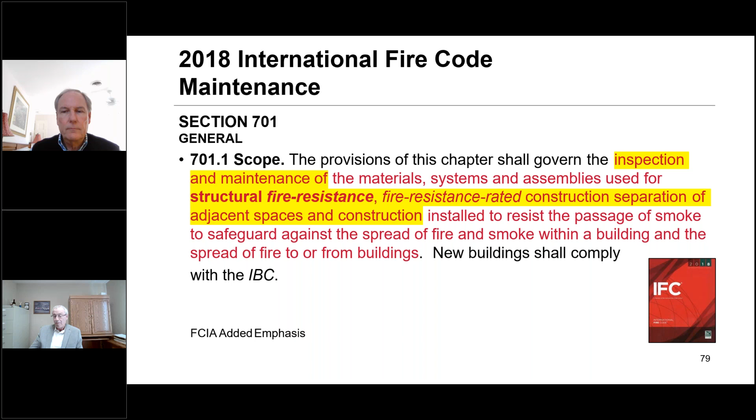Why don't you go on to the next slide then? Can you move on to the next one, Bill? I did. Oh, I'm sorry. There we go, I'm looking at the wrong screen.

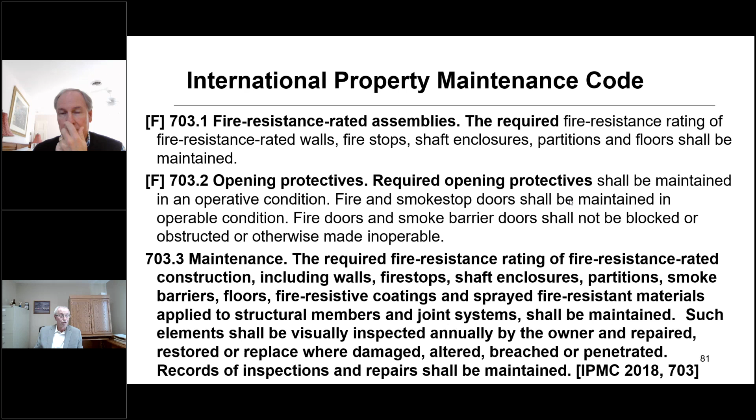A question came in from a fire official: well, we don't have this in Pennsylvania or Illinois or whatever state. Well, go back to whatever fire code has been adopted, likely NFPA 1 or 101. Guess what? You've got similar language in NFPA 1 and NFPA 101. The building owner or manager still has responsibility to maintain protection of fire resistance rated assemblies. It's quite clear in NFPA 1, the fire code, chapter 12, and NFPA 101 has it too.

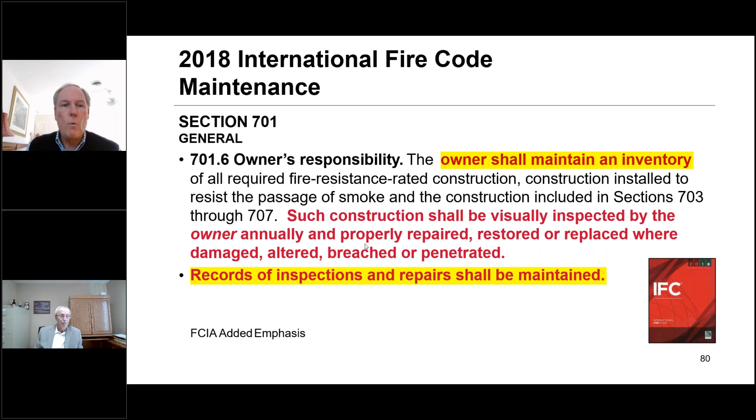And even if they don't have it - let's say it's something else - I'd still explain to our building owner friend: if there's loss of life or loss of property, where do you want to be sitting when there's a jury trial? In row 1 of the audience, or on the stand? Because if it's proven that something happened and the proper repairs weren't made - damaged, altered, breached, penetrated, and not fixed - and you're responsible for maintaining it, guess what? You're sitting on the witness stand instead of in row 1 or 2.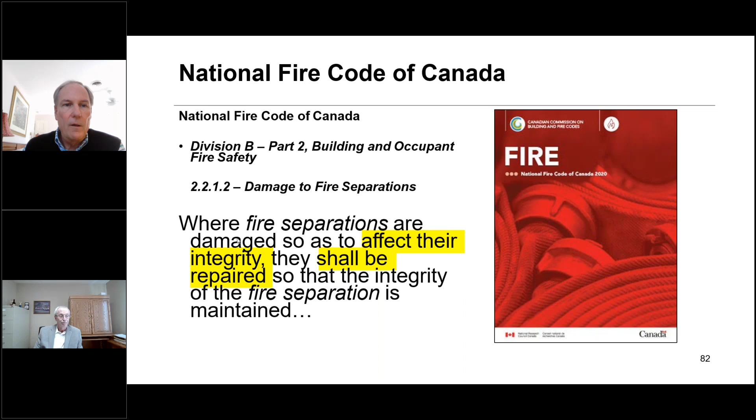Same thing with the National Fire Code of Canada. Even though it doesn't come out and scream it prescriptively like the other codes, because this is a performance-based code, it still means that fire separations and the structural portions supporting them need to have their integrity maintained. Any damage, no matter what kind - maybe too many combustibles on top of the wall, maybe somebody decided to do artwork or something crazy like that - that's the responsibility of the building owner and manager to maintain. When it comes to fireproofing, same thing in the National Fire Code of Canada: where structural material is damaged or removed, it has to be repaired so the integrity is maintained.

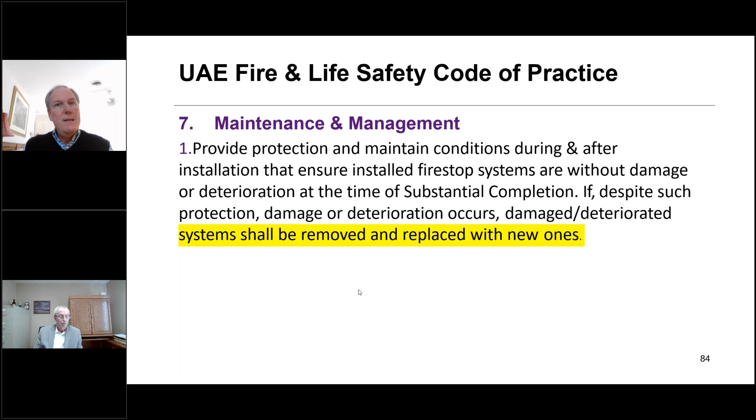Go to the United Arab Emirates - I'll be there in 2 weeks hanging out with my friends in Dubai. Same thing, replace it with new ones. This one only talks about fire stop systems, but you know how lawyers are - they'll twist it and say a fire stop system, in order to work, needs the wall to work, and you didn't maintain the wall, so there's a problem. So guess what, we're in the same boat whether we're in the UAE, Canada, the US, or other parts of the world.

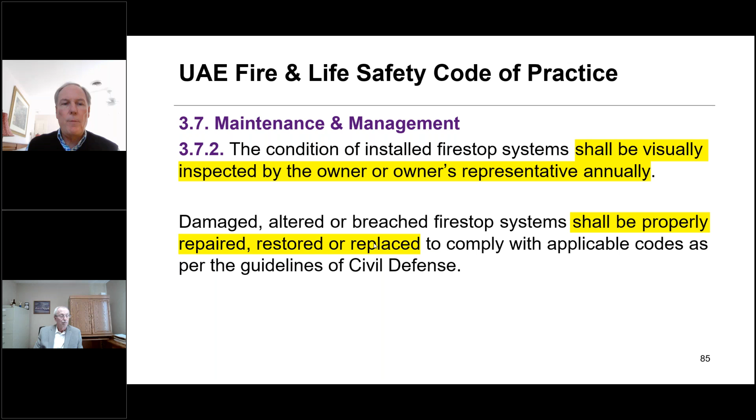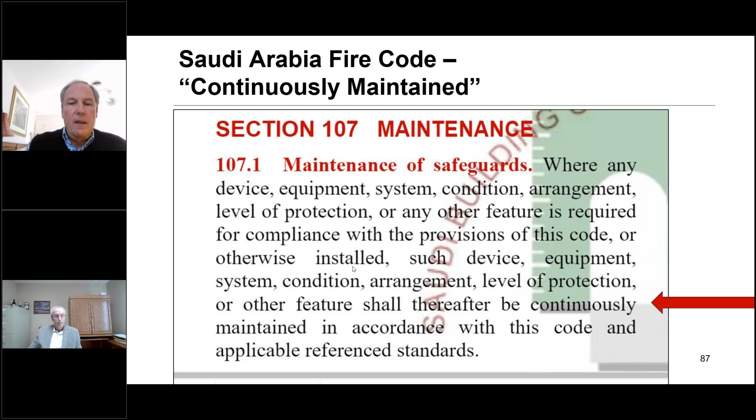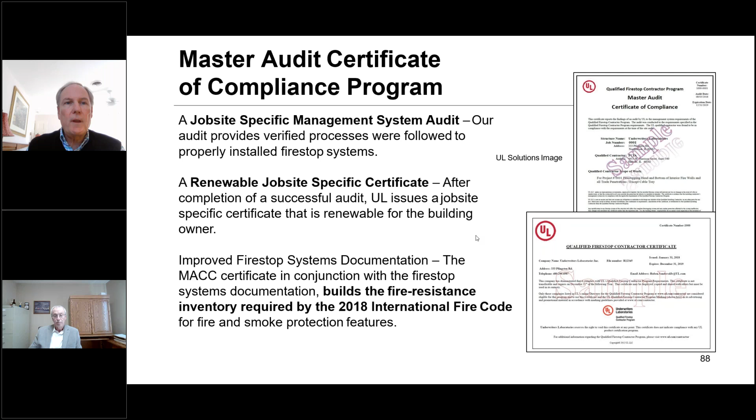Maintain in accordance with the code and applicable standards. One way to help building owners get this done at new construction and fire stopping is using the UL Master Audit Certificate of Compliance, and maybe this can extend to a passive fire protection inspection. What it does is has UL come out and verify that the contractor's management system was followed installing these fire stop systems. In order to renew it, it has to be done annually. Think about that when specifying as well.

So we've covered all the 4 corners, if you will, of this, and I've got about 7 minutes left. I'm going to go quickly through these next few slides so we can get to some questions and go from there. I do have another question that came in about the IAS AC 291.

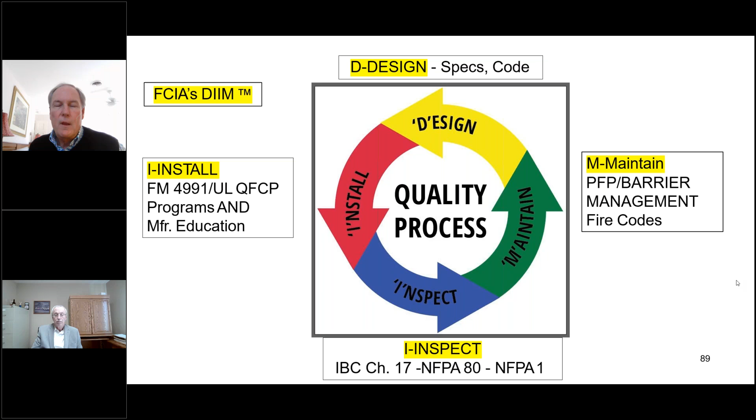That's back up in the inspection. The AC 291 that I covered really quickly is the inspection agency qualification. The International Building Code in Chapter 17 has 2 approvals for the inspection entity. One for the company, so the jurisdiction has to approve the company that has experience, equipment, and employees as a special inspection agency. The second approval by the authority having jurisdiction in Chapter 17 of their building code is to approve the individual inspector, that they have experience in the same type and complexity of materials and systems inspected. Those are 2 approvals. The first one gets missed all the time in specifications and also by the jurisdictions. They seem to focus heavily on the qualifications of the inspector and forget about the inspection agency company that's supervising the inspector and telling them what to do. That's where the IAS AC 291, or a program like it, comes in, where the management system of the inspection agency has been audited by a third party, like International Accreditation Services or others that do that kind of work. So that's where that comment came in to answer your question.

Whether it's for everything, not just the fire stopping, for doors, the dampers. Doors need to open, close, and latch under NFPA 80, and be inspected annually. Fire dampers, you saw, every 4 years or 6 years. The fire rated glazing, got to make sure it's still in the frame, still attached, has a bug on it that tells you the fire rating - whether it's an opening, has it passed a hose stream test, is it used as a side light, all that kind of stuff, and for how long is the fire resistance rating. All that stuff's got to be inspected annually by somebody. That's what the fire code says.

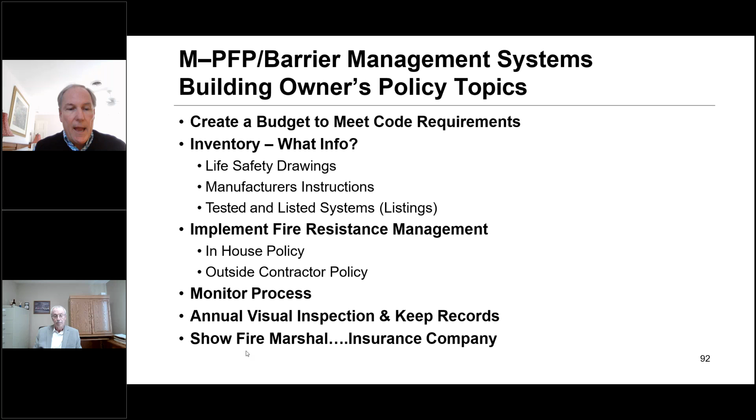We can go into another day, another webinar, to give you the very specifics of each one of these, so that you can understand more about the annual inspection, the responsibility of the building owner, and we think the fire marshal and insurance company as well.

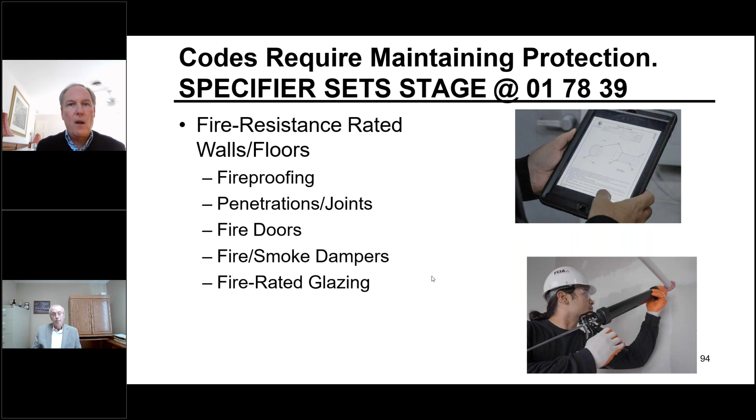So again, I mentioned the different types of things that are in that inventory. I will tell you that the specifier can set the stage for this by mentioning in Division 1, section 017839. How do I know this is a section? Dennis Hall, who put together MasterFormat, the 246-digit program, in the 2003-4 timeframe, was the MasterFormat test team chair at the time for CSI and CSC to get this done. Know that you can do this in each one of the disciplines: fireproofing, fire stopping, fire rated doors, dampers, glazing. Put something in Division 1 that references back to each of these individual sections. It says gather documentation and pass it to the general contractor or the building owner and manager as their passive fire protection inventory document. That's what you want to do. Use 017839 for that, and don't forget to refer back up to the other divisions for all the things that are needed there as well.

There are contractors that specialize in maintaining passive fire protection, located worldwide. They handle not just fire stopping maintenance, but rebuilding walls, checking dampers to ensure they open, close, and latch properly, making sure the angles around the perimeter are intact, checking doors open, close, and latch, and verifying the gap between vertical and underneath the door is appropriate. All the things needed for an inspection of some kind.

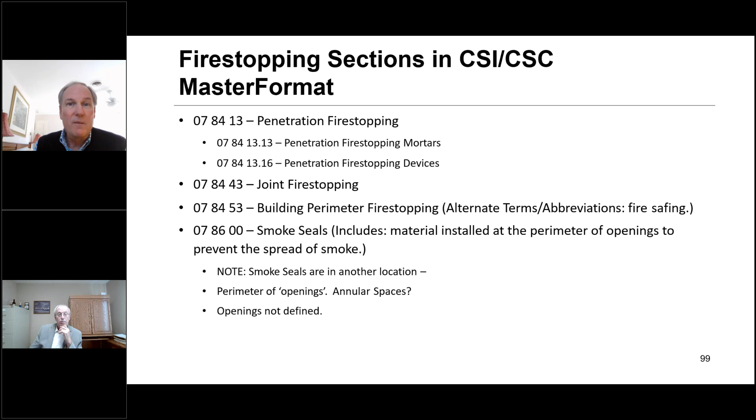Use MasterFormat Division 1 for this. When it comes to fire stop specs, specify it in one place, section 078400. That's why it sits there. Most large firms do this now, avoiding other sections for fire stopping because each might get used at different times in different projects with changing requirements. It's no fun when specs conflict with each other. Keep it all in one place, one section, all together. You can edit it, take out joints if you don't have any, take out perimeter fire containment if you don't have that, and just leave the text for each item in one place. What does the scope look like?

Effective barrier, and use the standards to limit flame, fire temperature, water hose stream, all that kind of stuff. Fireproofing, same thing—use the general spec for that as well.

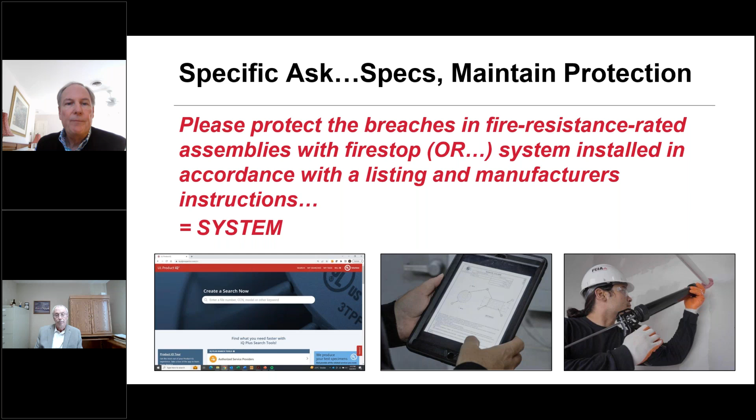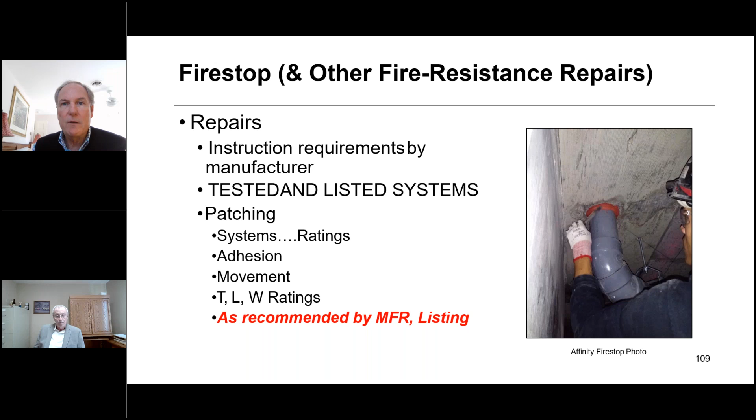Moving on, we'll save this for another specification day, another time. Just know that in your specification, you need to protect breaches in fire resistance rated assemblies with a fire stop, fire damper, fire door, or passive fire protection for structural purposes, for the horizontal assembly and the wall assembly, and install that in accordance with the listing and manufacturer's instructions to get things done. When it comes to repairs, repair in accordance with the listing and the manufacturer's repair instructions. We're starting to see manufacturers come up with more documentation for repairs and recommended methods as the industry matures more and more.

I had put this up earlier, so I'll skip over it and get to the most important part, which is the questions. Look at that, finished right on top of the hour, Rich. You're amazing. How did we get that done? Yep, you caught up after I got behind.